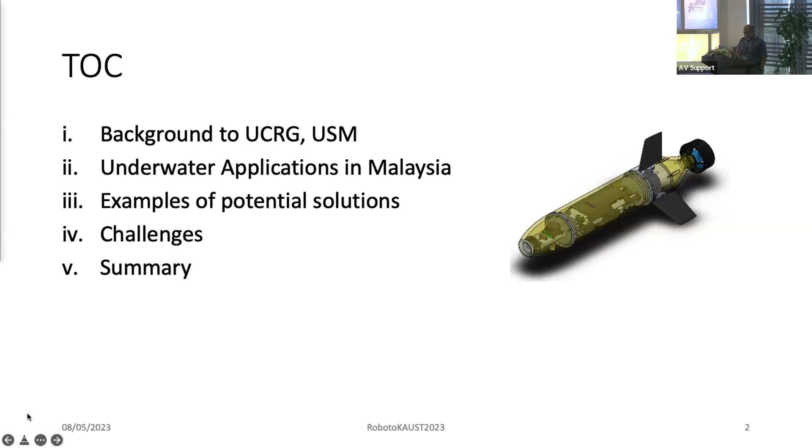This group has been around since we started it back in year 2000. Many students have come and gone and passed through the group, and we have developed a number of systems for our waters. So this is just a simple overview of our campus in Penang.

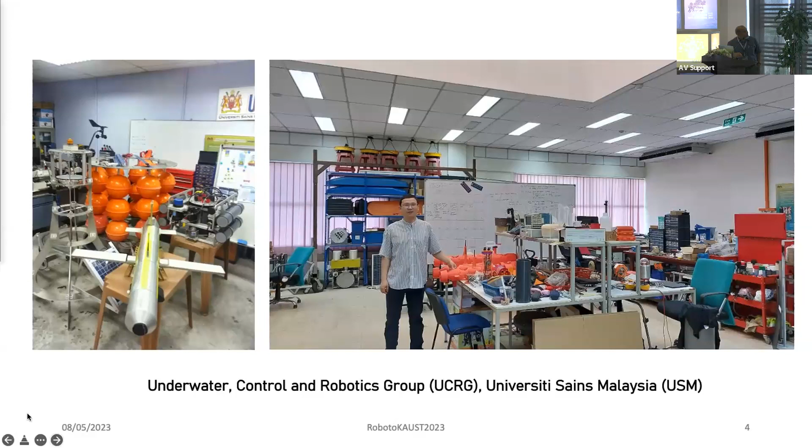It's an island in the north part of Peninsula West Malaysia, about a 4-hour drive from our capital city, Kuala Lumpur. This is a visitor, my colleague from China, and this is some snapshot of our lab.

Since year 2000, we have been working in 3 domains of research themes. We work on robotic platforms, we've worked on intelligent decision making, or AI, and we work on sensor design, developing devices. So it's a 3-pronged kind of approach.

Among others, we were looking at approaching the supervisory-based system, totally semi- and fully-autonomous systems, and also hybrid systems.

In this case, we work on localization, intelligent sensors and modules, meaning, for example, we have developed MEMS-based acoustic sensors to measure flow, for example.

Just to explore, as we know, acoustic sensors are very dimension-based kinds of sensors. When you explore MEMS-based sensors, it's very challenging to match the size and the wavelength of the signal.

So we work on artificial swarm intelligence. Nowadays, for the past 4 or 5 years, we've worked on swarm intelligence, developing low-cost platforms. By low cost, I mean price, because as we know, marine modules are very expensive.

Inertial navigation systems are very expensive. DVLs are very sensitive stuff. We want to see a democratization of these products - it's so expensive for us to use.

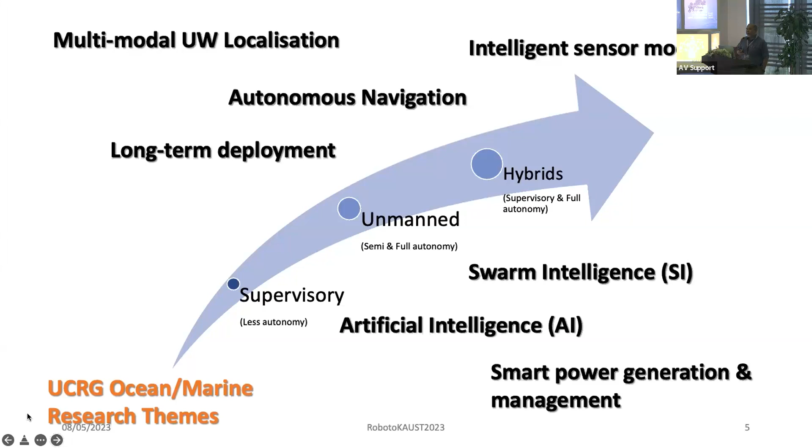So the title is about swarm intelligence, and I will share about 5 of the works we've done over the past 10 years, just to give a glimpse of what we've done, to give an idea. So this is Malaysia.

So it's very difficult to ensure that you can get back your vehicle.

For example, in the Malacca Strait, the average depth is around 50 meters; at most we've done mapping around 90 meters. That's the maximum depth. That's why every time a submarine plies this route, they always have to stay on the surface, because as far as I know there's no acoustic-based modeling for mapping here, and you can get stuck underwater if you go down there.

And it's very muddy, very shallow compared to the bigger oceans, as mentioned by Prof. Jones - I think the average depth there is about 4,000 meters. So this is nothing, it's shallow.

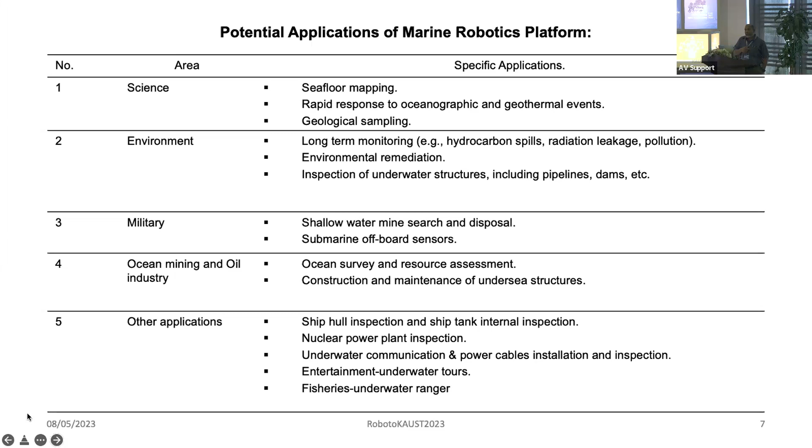For our group, we have been focusing on environmental and science applications, never military, and also oil and gas, and a bit on ship hull inspection and ship tank internal inspection. This is among the applications that we've been doing.

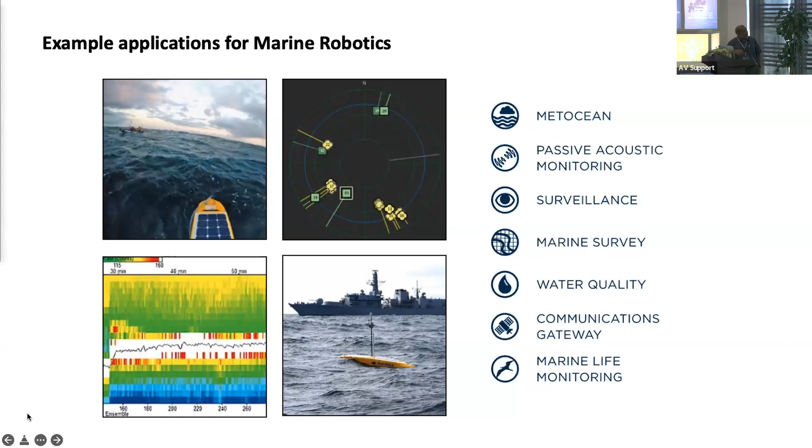There are many more applications, metocean, passive acoustic monitoring, surveillance. But from our experience, we know many of our counterparts in the temperate zones have done a lot of research, but sometimes the solutions may not be applicable to our waters because of the temperature difference, the dynamics, etc. So there's always a need for fine-tuning the system if we get it from outside, from different suppliers, for the different type of waters it's calibrated for.

The problem with doing this inspection is that at high tide there are two cycles, so you have a very constrained time window where you can inspect underneath, and sunlight can only reach maybe 2-3 meters before it's total darkness.

So there's a high chance that if you put your vehicle under here, it's going to get stuck and you cannot retrieve it. So it's quite challenging. There's also an issue with subsidence on the land side of the port, so they were worried about the poles supporting the platform.

So there is a serious need. I guess a similar problem also happens at other harbors or ports, but for this one, access to the underside of the platform is very limited, and you only have certain hours allowable for inspection. So it's just an example. This is the upper part of the platform, the jetty.

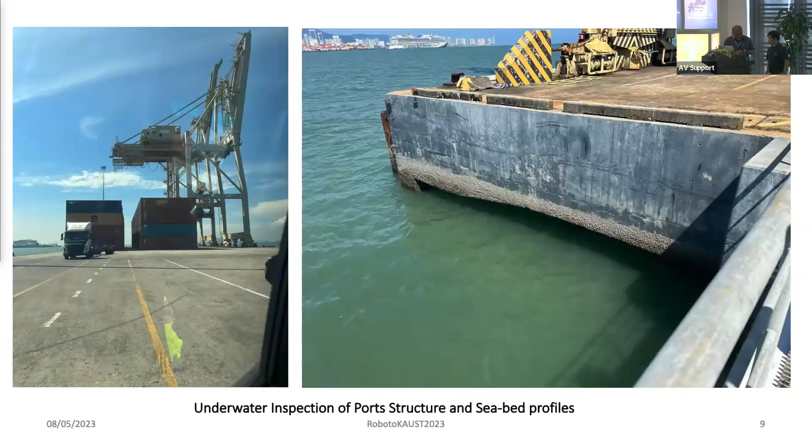And this is another application, a marine park monitoring inspection.

In Malaysia, I'd like to highlight the issue of coral reefs. In Malaysia, Indonesia, Brunei, that area, we have what we call the Coral Triangle Initiative, because the combined size of the coral reef in that area is as big as the reef in Australia. If you have not worked with the CTI group, KAUST would probably want to, because they've been working on coral preservation in the area for a number of years.

So in Malaysia we have around 38 marine parks with similar problems. We use divers to do mapping, and this is one example on the east of Malaysia in Labuan, which is just off the coast of Sabah, the northern state on the east of Malaysia, East Malaysia.

This was done using divers, manually, so a similar problem as mentioned by many of the speakers, which we're trying to solve, or partially solve, using robotic solutions. As mentioned by one of the speakers, we want to do persistent monitoring and observation rather than very selective kinds of inspection.

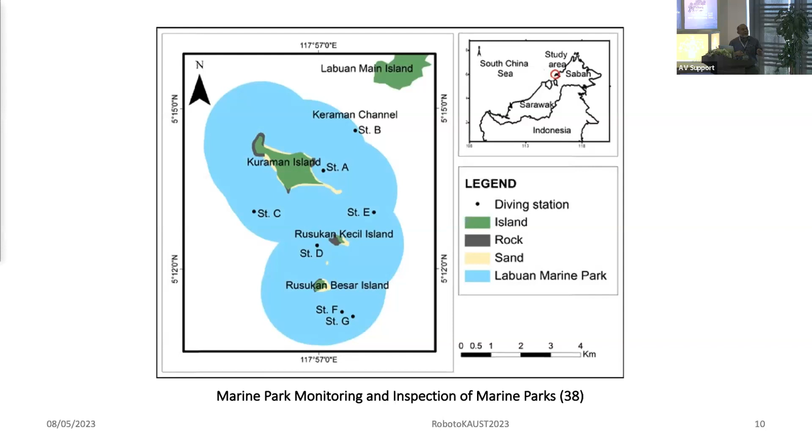So I will briefly go through this. We developed, as I said, focusing on three main themes: robotic platform development, the actual platform, sensor design, device and utilization of sensors, and also intelligent decision algorithms. This is one of the algorithms we developed for control of autonomous underwater vehicles for pole inspection.

In Malaysia, a very significant amount of the country's budget is contributed by the oil and gas industry. We have a national oil company, Petronas, which contributes at least 30-40% of our yearly budget. We have many oil platforms on the east coast of East Malaysia and on the east side of West Malaysia.

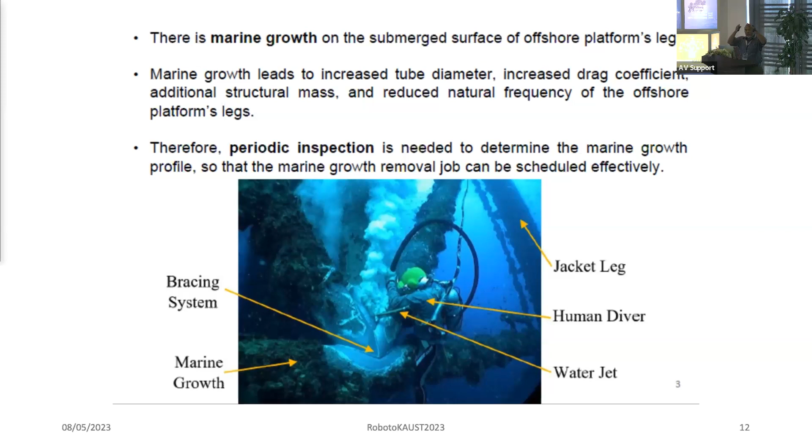So one of the problems is on the jacket leg inspection, the pole inspection of the oil platform.

So we developed some system and control in order to inspect, to explore what would be the best trajectory plans, in order to optimize and reduce the time needed in the water, because of tide etc. There's also a limited amount of time you can spend underwater, so you need the optimum path planning or trajectory planning to acquire the most information.

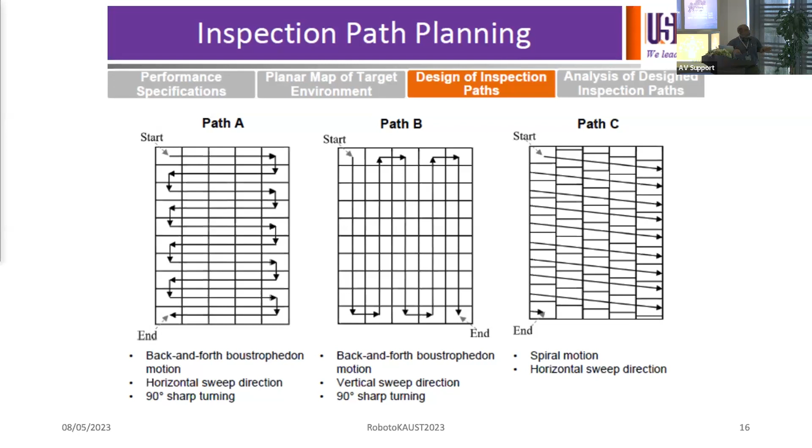So we explored a number of paths, and this is an example of a jacket type platform that you can have on the oil platform. So we developed some solutions. Now they are using divers. As you imagine, we have around 200 oil platforms, and each would have at least a number of poles. So how many divers do you need to inspect every one of them? There is an urgent need for robotic solutions. But even if you deploy a robotic solution, you must make it optimum, you cannot just let it be.

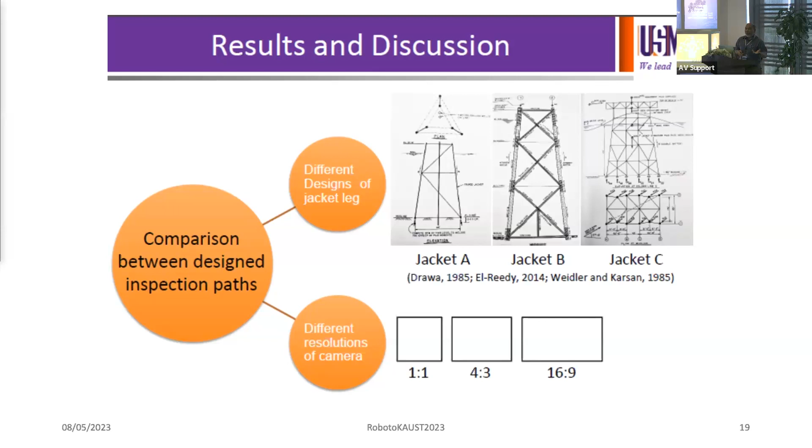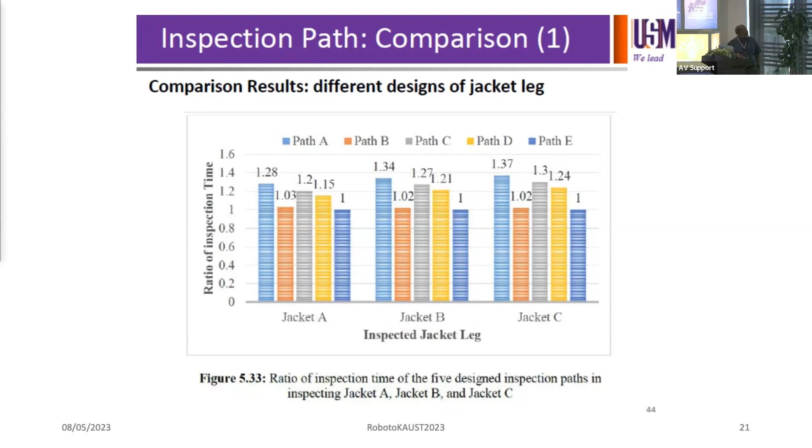So that is one work we've done, and from here we can see that the best path is path number 5, path E, which gives the best performance for the inspection. I'll just skip this one.

And then we developed the platform. We developed an underwater glider, back in 2014, but this was the first time we developed it. This was the challenge - I know some of you are using underwater gliders, but we've studied sea gliders and the Slocum, etc., which are unique and made for deep water. The problem with our waters is that it's shallow water.

As you know, most of us have used acoustic modules, and you have a lot of noise when you use them in shallow water because of reflection, and you cannot get accurate results. So when you use acoustic signals for imaging or localization, it's very problematic in shallow water. Just a side note, in Malaysia we have snapping shrimp in that region, which give very high frequency noise. So if you try to image using high resolution acoustic signal, you get worse results because of the snapping shrimp - just to give you an idea of the complexity of shallow waters.

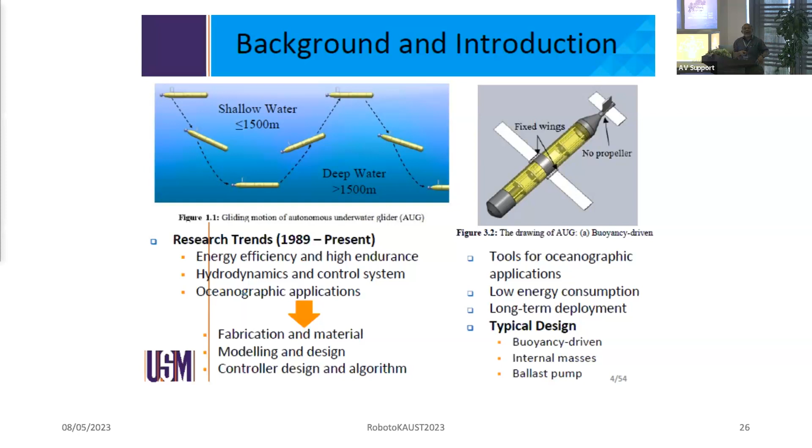The problem when you use gliders in shallow waters is that you cannot use it for long because it keeps pumping due to the shallowness of the water. You need at least 800 or 1,000 meters as the optimum depth for a glider. So we worked on how to develop gliders for shallow waters so that you can deploy it at 100 meters and it can still glide well.

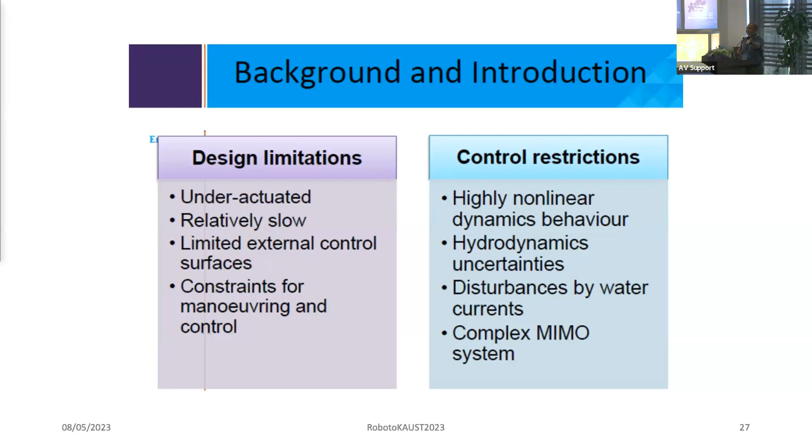So we realized a lot of issues for gliders, and that doesn't negate the issue of security. When you deploy your gliders, there are a lot of fishermen around, in the Malacca Strait. It has happened - one of our universities deployed a wave glider, not an underwater glider, a wave glider, and Vietnamese fishermen took it home. So how can you prevent that, because it's open water? So those are some of the real challenges - when you overcome the technology problem, you then face the problem of how to deploy it and get the data without interference from others.

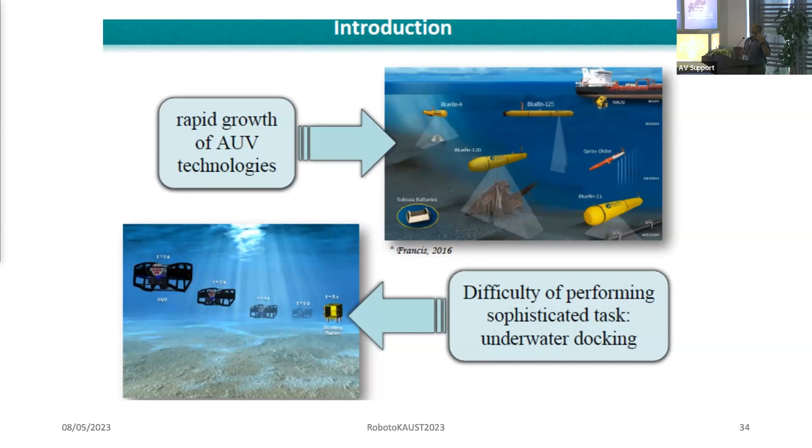So we develop the gliders and test it etc. I'll just skip this. And then we work on docking. We work on docking because when you deploy your underwater gliders or AUV, you want it to be recharged, but you do not want to deploy and retrieve the AUV too often. So you want it to be able to dock. We work on underwater docking using a Blue Robotics platform.

Basically it's an image-based guidance, because our presumption is that because of the distance there's a global and local guided navigation. So within a certain region we can switch to image-based, and we developed an algorithm, a visual servoing for docking. As you can see, all these are part and parcel to solving bigger problems with particular solutions. For realistic deployment of AUV, we must solve the docking problem, because once you solve docking, you solve the recharging problem and the data transfer problem - you cannot just deploy and take it out and deploy it again, which negates the benefits of using AUV, because you do not want a mothership.

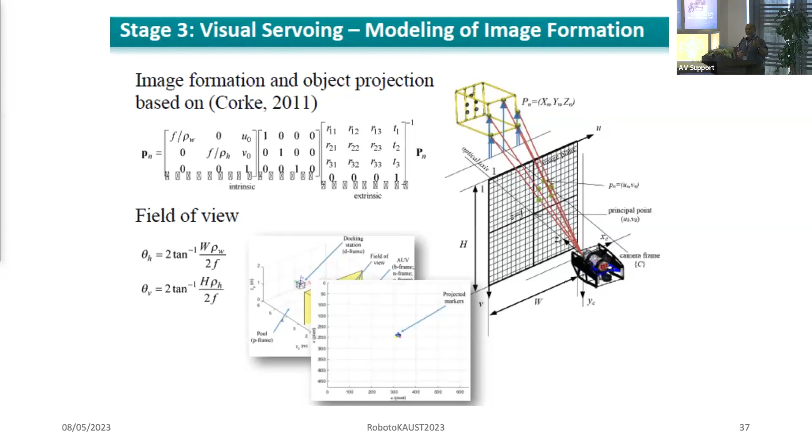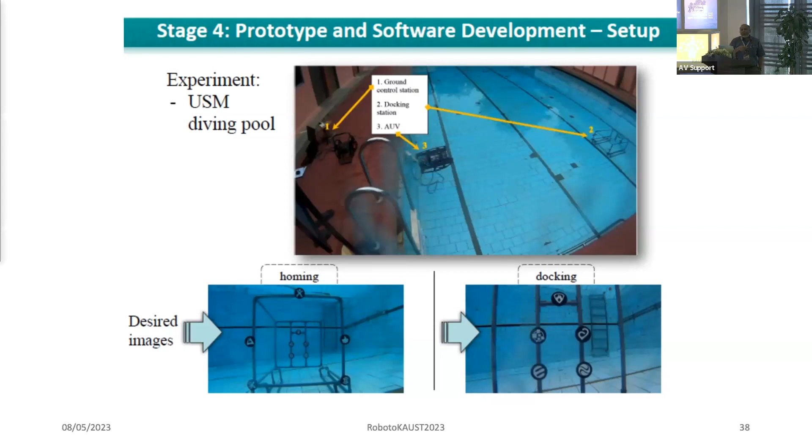You should be able to send the AUV, get the data, and it should be there without interference ever so often. We are not like my friend from Maki Lab, because they really go to the ocean. We do not have the luxury, so we do many of the tests in our lab, and now we are only starting to go to the sea.

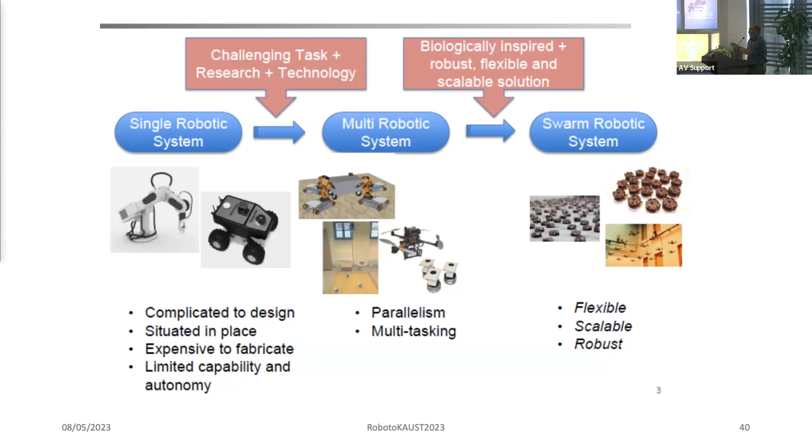So what we did was we developed this floating buoy. We developed about 14 of them, and we use it with hydrophones at the bottom. What we did this for is that we want to use it to do source localization. Let's say we test it, put a beacon sound source at the bed in the water, and see what's the best algorithm for it to triangulate to the source.

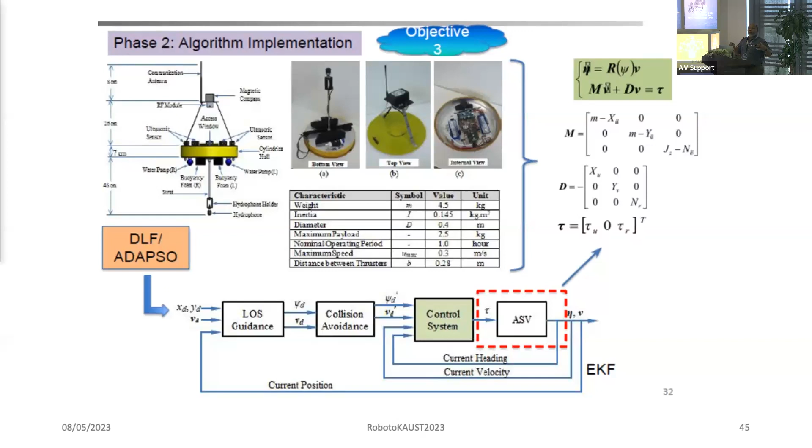So this is the platform that we've developed, and we developed several at the same time, so you can see there's a number of them. The chair is not part of it, the chair is just to ensure that the acoustic sensor is not broken, so nothing to do with it. We have developed 14 of it, and we use it as a platform to test and determine what's the best swarm algorithm for our application.

Okay, and lastly we also developed what we call a blimp system. This is to get an aerial view. So if you follow my presentation now, you can see that we developed an underwater inspection data gathering device, a floating device, and an aerial data gathering device. In this case, we decided to use a blimp, which is a helium-filled device. This student, my previous PhD student, developed the blimp system in order to work in collaboration with the floating device, so that we would like to capture an event, temporal and spatial information, getting the underwater data, surface, and aerial information together.

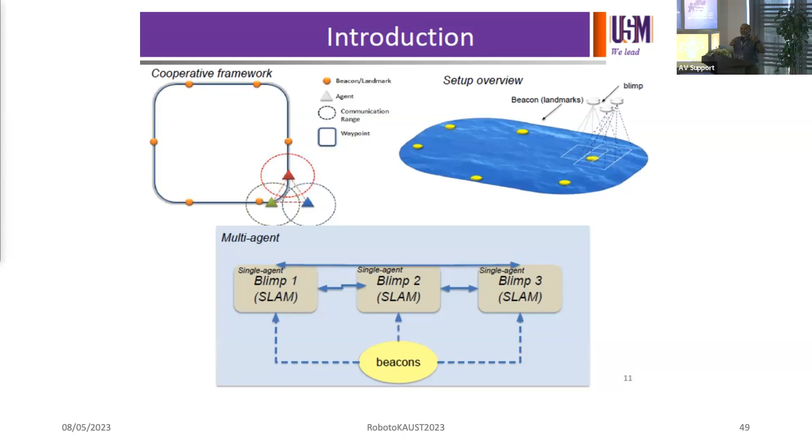But one thing we realized when we developed this is that there's a lot of complexity of synchronization in terms of communication, because the floating device is communicating via RF with the flying device, and the floating device is communicating acoustically with the gliders. So the speed and delay are different, so there's quite interesting complexity in terms of how to get all three of them synchronized.

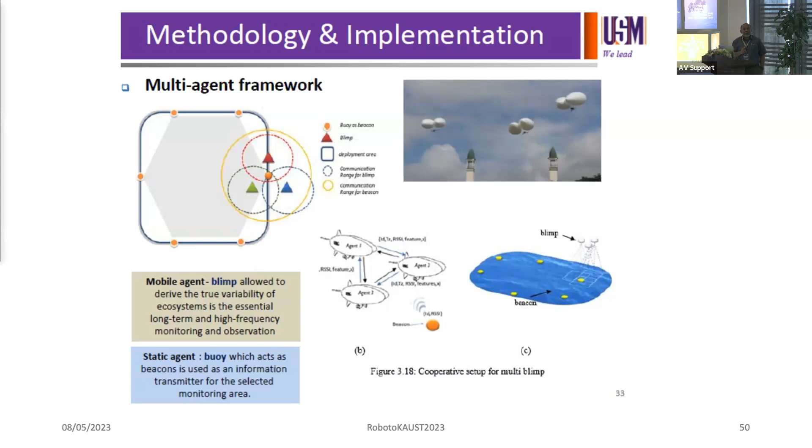So this is, okay, obviously this is not in the sea because you cannot see this. This is a mosque, it's not in the sea, this is in our campus. We try to test the mosaicing, image mosaicing capability, so you can see the swarm approach can be applied for a different kind of platform. We have explored applying it to floating in the water and also aerial platform. The reason we use blimp is because blimp is easy to control, but the problem with blimp is it's very prone to wind, that's a problem, so we control the height.

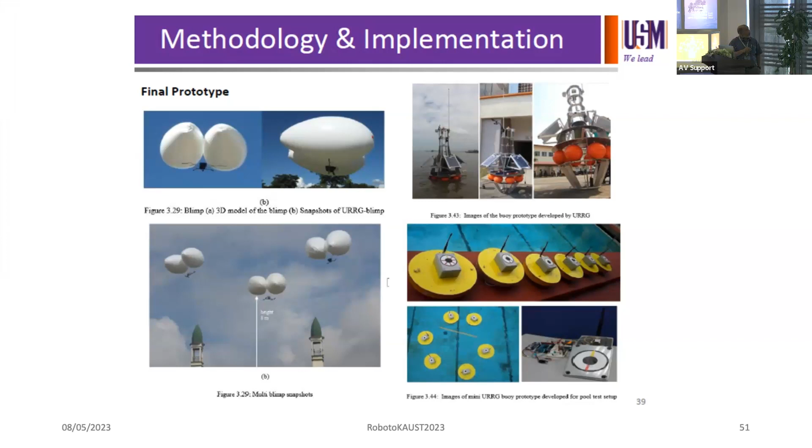So this was the kind of platform. I didn't share it here, but we also built this buoy, intended for marine park protection. So you can see what we did was we tried to make it into a system: the buoy, the floating craft, the aerial craft, and also the craft inside the water.

So to us, we have gathered a number of challenges. I would say the challenge is the design and development of a robust platform for the non-linear underwater environment, because the main problem is to develop a reliable model. I totally agree, if I have access to finance, I would go for Prof. Maki's route, which is testing in the ocean, because then you can really ensure that your model is reliable.

Now our model has yet to be properly tested in the water, because once you test in the water, then you know whether your model is really robust or not. In terms of new localization methods, these are needed for shallow water application, which is less than 30-meter depth. Of course, for 30-meter depth, it's still okay, but the image of the pool I showed you recently has a maximum depth of 12 meters.

The problem is that if you deploy our vehicle in the water, it's very difficult to localize our platform, and the water is very turbid. That means visually you cannot see the craft. It's only about maximum 1.5 meter visibility. So that's why localization for such a shallow water column is critical.

Then for us, access to good testing facilities and resources for field testing are critical, because this is our own problem, probably not applicable to most of you. And then there's the availability of reliable energy harvesting modules for long-term deployment platforms, including smart power management systems. As for now, we have not developed this ourselves, but others have.

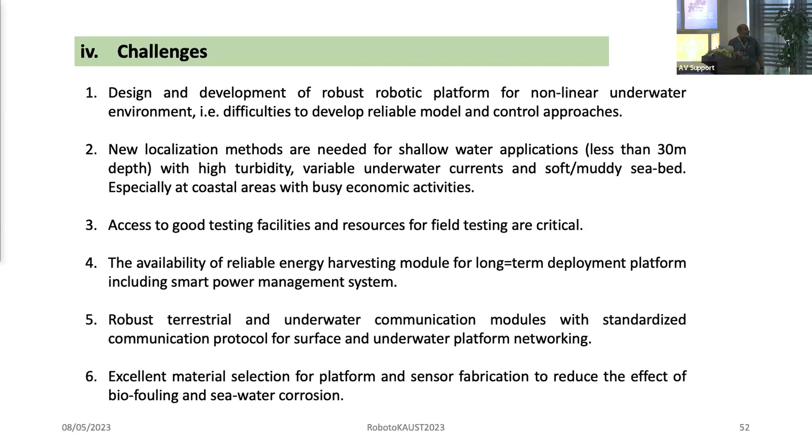In summary, to me, intelligent autonomous platforms will, to a certain degree, remove the need for man on boats and humans in the underwater environment. This is a key issue for many ocean-related industry sectors.

For us, I'll give an example. When we engaged one of the oil and gas operators in Malaysia, we proposed a very reliable robotic solution, but in the end, the company said they still trust human observation. So this trust deficit is something very difficult to overcome with just excellent technology and beautiful slides.

And then, highlighting the important role to play in baseline studies: in our waters, the Malacca Strait and South China Sea, one of the problems is there is no available acoustic baseline data. Probably military guys have it, but the commercial or scientific community do not have access to any acoustic baseline study. So baseline study from the acoustic perspective is not available. There's a lot of things that need to be done.

In terms of data collection, one of my mentors, Prof. Rodney Coates, said that in ocean work, you do three things: measure, monitor, and manage. If you want to monitor and manage, but cannot measure, you cannot do it. So you must always be able to do proper measurement. Then we can talk about monitoring and managing the resources. It boils down to sensors and making sense of the data from the sensors.